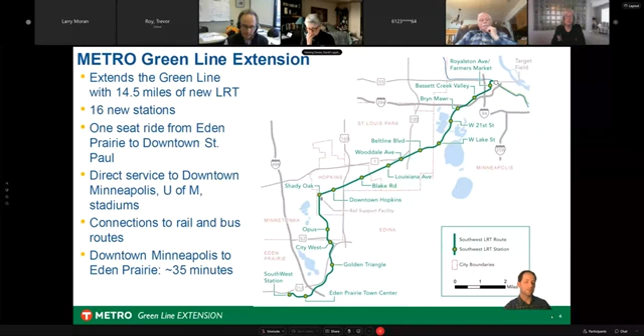As part of our construction project, this is the scope we always like to share. Not only are we building those new stations, but we have a number of new structures, bridges, and pedestrian tunnels. People are very familiar with the Kenilworth LRT tunnel, as well as the Trunk Highway 62 LRT tunnel being constructed on the west side of the project. We have a number of places where LRT crosses at grade - those are the LRT grade crossings - and we have over 125 retaining walls. So a lot of structural and civil work being done as part of this project.

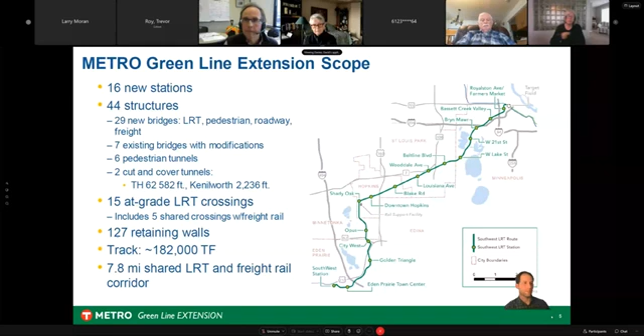So we'll get right into the project update. A lot of folks have seen this slide before. We just always want to set the table with what we have completed up to this date. We have the majority of utilities complete. Of course, a lot of the site prep, demolition, work zone establishment, that's mostly done at the beginning of the project. And we are right in the thick of the civil construction, which is the construction of structures, track, stations, some of the elements that I just touched on in the slides before.

As we move forward, we're going to continue with civil construction. We'll talk about that schedule in just a couple moments. But we have already started to initiate the other main portion of this work, which is the systems work, where we run the electrical and construct the overhead catenary system, our communication system, things like that. And then, of course, prior to opening, we will be conducting testing of the line before we have passengers on it.

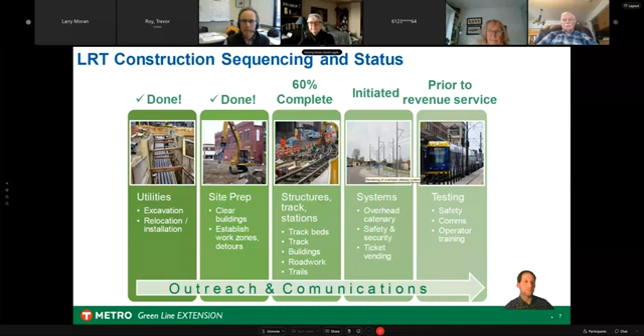So, as we're speaking to the Minneapolis community tonight, we know that the community is very familiar with a couple of the main challenges faced by the project, but we just wanted to run through them tonight. These are challenges that were either relatively unforeseen, or we knew about them but needed to work through them in a specific manner and order.

That includes the corridor protection wall up near Bryn Mawr and into downtown Minneapolis that was added by change order, even after the project started construction. That certainly has added some significant time to the construction schedule, specifically that schedule in Minneapolis.

We'll probably talk a little bit more about the secant pile retaining wall adjacent to the Cedar Isles condos. That was due to unforeseen soil conditions, right? The settlement that had occurred, and out of an abundance of caution, we pivoted away from the initial sheet piling method that was incorporated in the project to this different and more conservative method of retaining soil so that the tunnel could eventually be excavated.

That's another major complex change that had to be overcome and has caused delay. And then the incorporation of the Eden Prairie Town Center Station, of course, was also added to the construction contract by change order later on in the process.

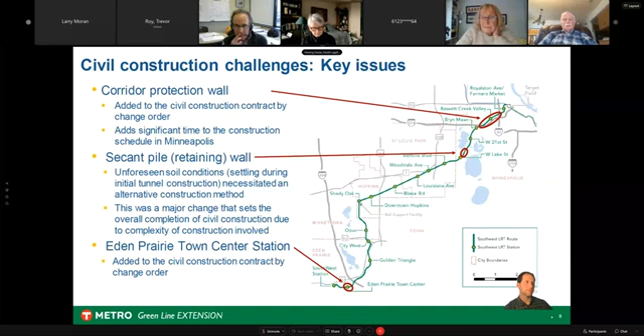We've laid this out in a couple meetings before, but we came out in January with information about a revised schedule and anticipated revised cost. We wanted to step through that with folks briefly tonight. We've been doing this in a number of different meetings. We want people to get a really good understanding of what goes into this revision of the Southwest Light Rail schedule. So what you're seeing here is we've got the original civil construction schedule and cost, but now due primarily to those changes that we just went through...

We've got a new scope, right? And new civil construction needs that need to be addressed. Those needs are being addressed through an agreement with Lunda McCrossan Joint Venture, our civil construction contractor, and the resulting change orders that will be processed, which will result, unfortunately, in an additional 34 months of anticipated civil construction. So the take-home message here is we've got our original schedule, and the changes to the project, which add on this time that's needed to construct those changes and deal with those changes, and that gives us the revised civil construction schedule and eventually the cost.

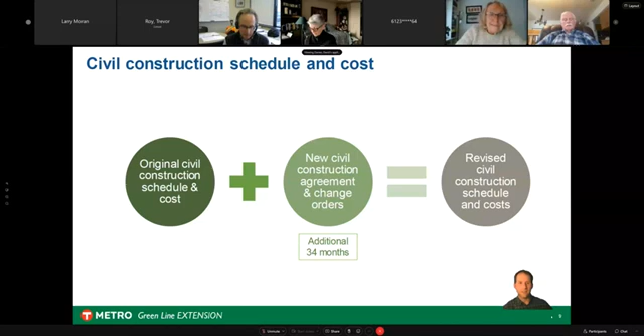A lot of people want to know what are the details behind this delay in this work, this added time and the cost. We're still figuring some of that out, right? There's still clarity to be had there, but we've been working at it for over a year now with the civil construction agreement, and we're working diligently.

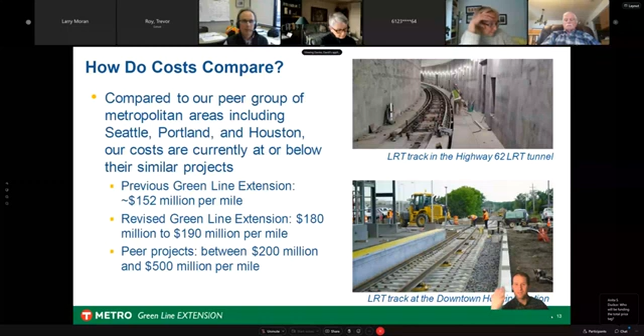Just giving a little comparison here: the original project budget was 152 million per mile. That's being revised upward, but we also see peer projects still in the 200 to 500 million range. Certainly there are other projects that cost less, you can find projects that are less, but we want to acknowledge that we still remain comparable to a lot of projects across the country, especially given the complexities of some of these, like a lot of bridges or tunnels, those very complex features that we are dealing with.

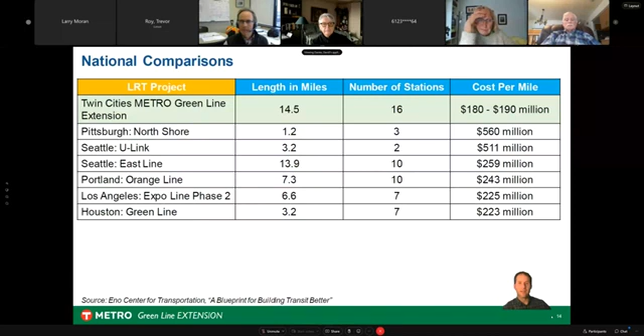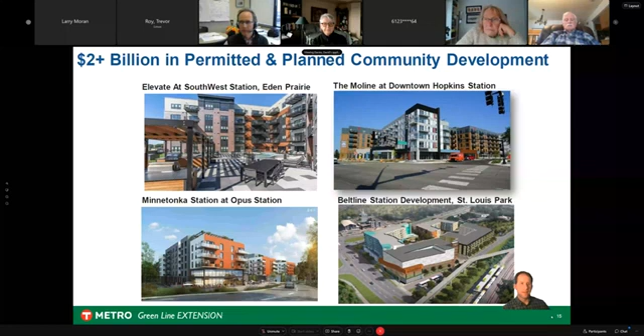We always like to remind people that even though the project is delayed, we've still seen a lot of investment already in this corridor, and we're going to continue to see investment, which is really positive. These are just a few examples, but it's exciting to see these entities already being active, and the corridor already starting to activate and be ready for our opening day.

Of course, we always like to report on and make people aware of the disadvantaged business enterprise goals that we have set. We want to make people aware tonight that we are currently achieving, or getting close to achieving, a lot of those goals when it comes to the disadvantaged business enterprises associated with the project.

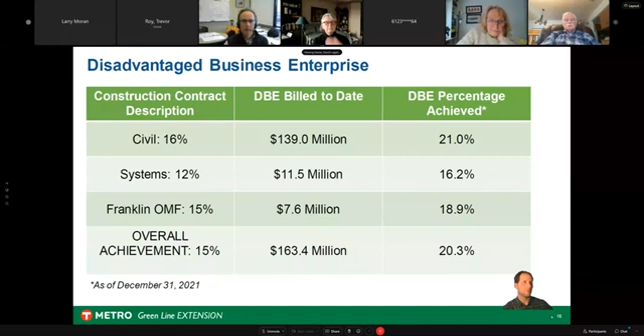Finally, this is our last couple of slides for the project update, and then we'll take a couple questions. It's important to remember that the people working on this, not necessarily council staff, but there are a lot of folks continuously employed as this work progresses. There's a lot of pride in that among the people involved here, and we always like to make sure people are aware of the folks continuing to bring home paychecks as we're progressing with construction.

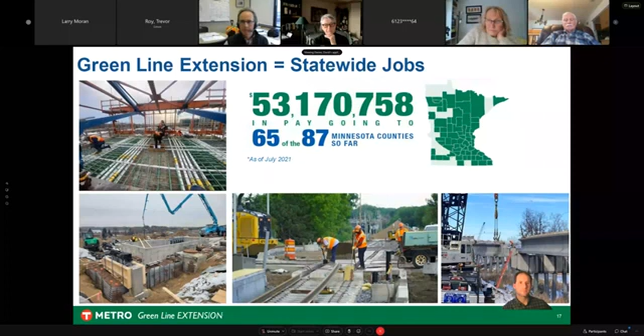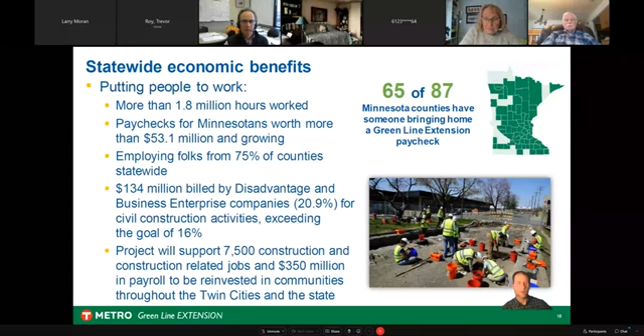This slide basically says that, but just gives you a little bit more meat on those bones in terms of just how much, you know, number of paychecks and how much money is being brought home by people who are affiliated with the project.

So I will pause there. I'm going to pivot to the chat and just see if there's anybody here that's given any chat questions.

And Anita asked who will be funding. We got a question about who will be funding the total price tag. That's certainly something that all the project partners are going to be figuring out in the coming months. That's sort of that acknowledgement that there is a funding gap, but everybody's working hard to figure out what to do there, especially as we move forward and have clarity with the exact price tag, as that becomes clear. And Anita, I think I see your hand up.

Yes, just for clarification, because you said on one of your charts that it wasn't going to be the city that was going to take on that price tag. So I would be interested in knowing, if it's not the city residents or taxpayers, then who would it be? Not that you have a total answer, but like who else is at the table that you're even considering?

Thank you. Say, David, this is Jim. Maybe I could speak to that. Sure, Jim. Thanks. All right.

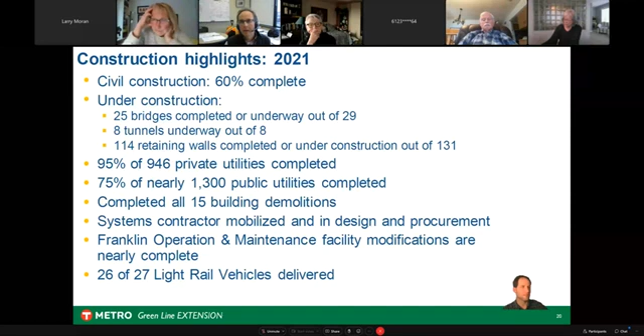This is our general slide - we have a vast majority of our stations underway. Certain stations are in much more advanced stages of completion. Up in the top right corner, you see the West 21st Street station, which looks almost as complete as some of the others along the line. It's pretty remarkable to see - you don't have to squint anymore to see what that really looks like, which is really cool.

There are a number of other stations in similar stages of completion along the line, and what you're going to see this year is work on some of those other stations coming up.

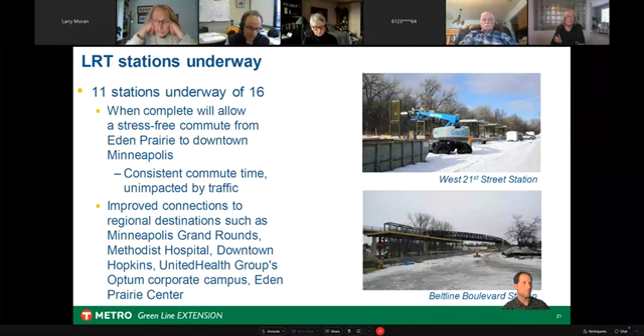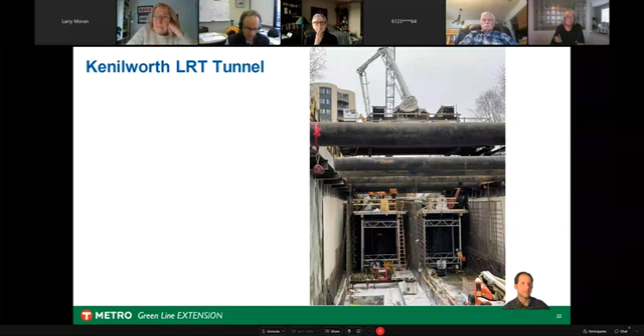In 2021, a lot of progress was made on the Kenilworth Tunnel, and it's pretty neat - we love this picture because this is one of those where you start to squint and really see the finished conditions - the two portals through which LRT is going to be traveling in the tunnel. That will be covered, so you wouldn't see it exactly like this in this spot, but it's neat to see that perspective of construction.

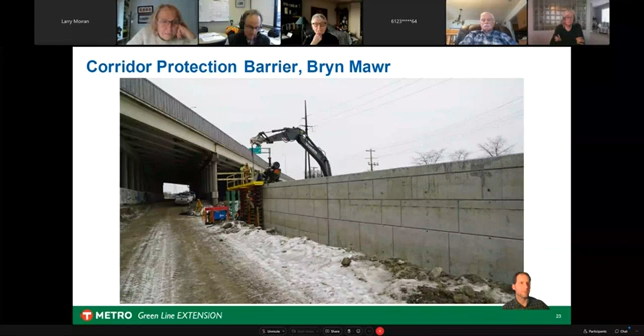One notable element we've talked about tonight is the corridor protection barrier in Bryn Mawr, and it's notable that the contractor has really been successful in moving this construction forward. If you're traveling along the Cedar Lake Trail in that area, you see significant progress in the drilled shafts and the rebar that was erected. They've been pouring concrete panels for much of the past 6 to 8 months, showing some real significant progress there. That's encouraging news over in the Bryn Mawr and Bassett Creek Valley area.

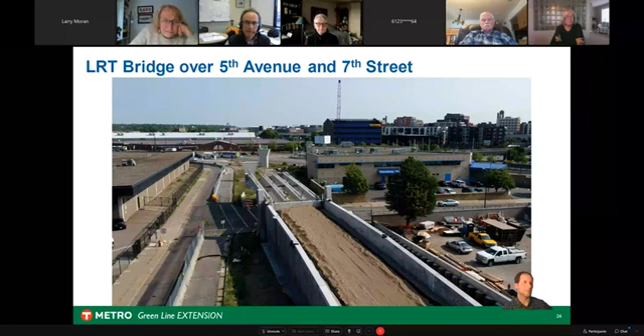So just briefly wanted to cover some of the notable activities and things you're going to be seeing this year in Minneapolis. Let me move my camera here so I can see my other monitor.

So, of course, we have secant wall construction, which is currently paused, but we see tunnel construction overall—construction of the tunnel that includes excavation, secant wall construction, and actual forming and pouring of the tunnel structure itself down in the excavation area. We see that all continuing to progress this year through 2022.

We had a meeting earlier this year about the closure of Cedar Lake Parkway, and at the time we certainly thought it was going to be closing earlier than it has. It has not closed yet, but we still anticipate about a 10-month closure. Right now, as of last Friday's construction update—please sign up for that—we think it's going to be more in the April timeframe to close down the parkway.

But once that's done, we'll be excavating and constructing the tunnel through that area. You'll also see, coming this summer and fall, more activity at the Kenilworth Channel area, including the anticipated demolition and construction of the trail bridge in that area.

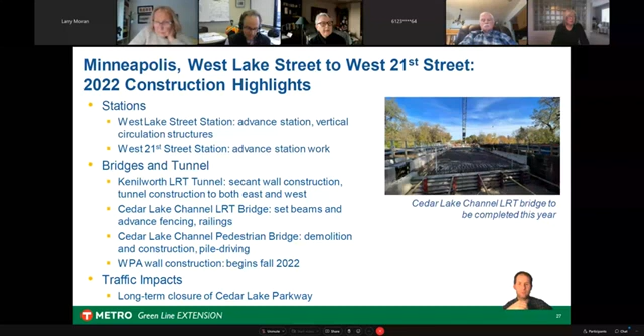So generally speaking, you're looking at advancing the station work at both West Lake Street Station and West 21st Street Station, continuing the Kenilworth Tunnel work, continuing the LRT bridge at the Cedar Lake Channel, and starting work on the pedestrian trail bridge and activating the site for WPA wall construction. Notably, as we talked about, is the long-term closure of Cedar Lake Parkway, which we will continue to provide updates on and make sure the community is aware of prior to the closing.

That gives you—I'll use this opportunity, if you haven't seen our video for how we construct the tunnel and how this will be phased through Cedar Lake Parkway. I just posted a link into the chat. This comes from our meeting in January about the closure. I encourage you to watch that; it gives a little more perspective on what's going on in terms of tunnel construction and the closure of the parkway, and why we need so much time.

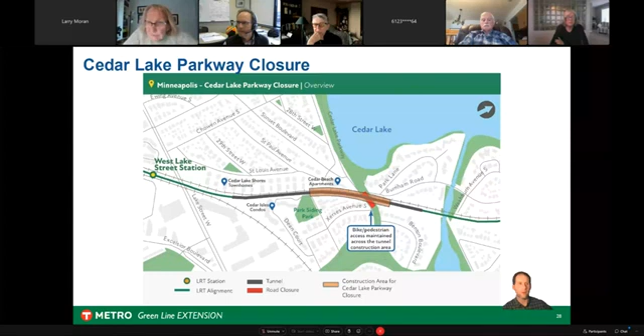All right, moving on. So we've got moving up into that Bryn Mawr, Bassett Creek Valley, and downtown Minneapolis area. Overall, what you're seeing is advancing the three stations in this area: at Bryn Mawr, at Bassett Creek Valley, and at Royalston Avenue Farmers Market.

Down at Bryn Mawr, you're going to see continuing work to construct the pedestrian bridge there that connects the intersection of Wayzata and Penn, coming out to connect to the actual station itself—that's out in the trail and rail corridor area. We do anticipate there could be some traffic impacts at Wayzata and Penn for some of that station construction. That's been a relatively quiet area, and our Bryn Mawr community members have been curious about when that's going to take place. We'll want to be in touch with them as there's more clarity regarding that schedule.

Corridor protection wall continues, certainly, as we've talked about. And then, notably moving up into the Royalston area, one thing we haven't done a lot of actually in Minneapolis, that we've done a lot of in the west part, is actual road work. A lot of our work is in the rail corridor. We've had roadway impacts or very targeted roadway work, and we will continue to have some of that.

But there's going to be some pretty significant road work along Border Avenue and Holden Street, right next to the Minneapolis Farmers Market. This is part of the project—it's a full roadway reconstruction, sidewalk to sidewalk, and we're coordinating with the businesses there to make sure we can keep access and move through that area as efficiently as possible.

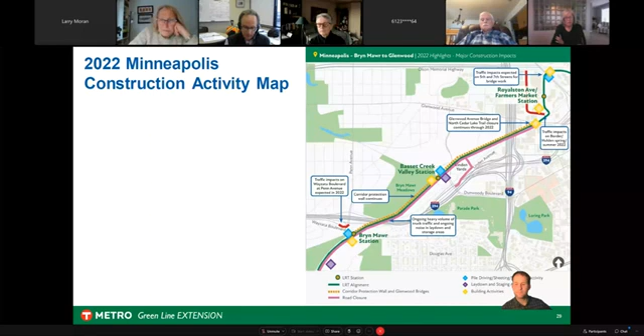So just to recap, stations are certainly going to be active sites this year. Corridor protection wall, you'll continue to see a lot of activity there.

Glenwood Bridge is certainly something where we've experienced some challenges. As we've talked about in the past, it's always challenging constructing this type of complex structure. Remember, it's three specific structures - they kind of tie into each other, two parts of a roadway bridge plus the LRT structure, and it's all next to the active freight rail.

We're looking to see how this work progresses, to see what a reopening schedule would look like, but a lot of that will depend on the progress that we can make through the main construction season. So there will certainly be updates on that front later this year.

And then you'll see, as I showed earlier, the image of the 5th and 7th Street LRT bridge that ties into Target Field. A lot of work on that area around the Herc incinerator as that structure gets closer to completion.

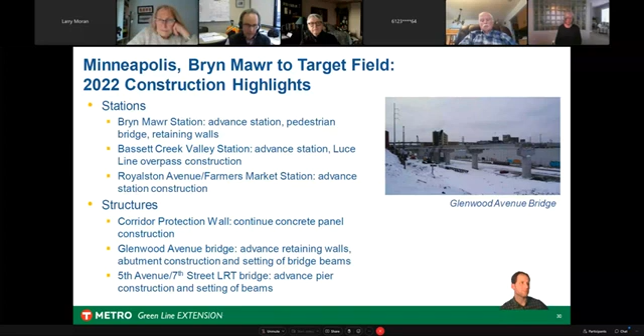Traffic impacts, we've kind of summarized this, but Border and Holden certainly going to be active for most of this construction season. 5th Avenue and 7th Street around that Target Field area is going to see some impacts probably as we're setting beams or constructing overhead. And then something for the Bryn Mawr folks, the Wayzata and Penn area for that roadway reconstruction near the station.

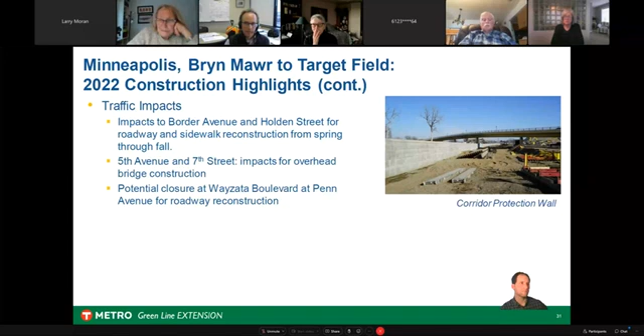Just a couple notes on the group that I am a part of on the project office, the communications and outreach team. We were certainly, even though construction events were fewer, we still had a very busy construction season last year, and took a lot of calls, answered a lot of emails, still had a lot of meetings, both on-site and virtual, connecting with the community.

Here's my information. I think a lot of folks at this point on this call would probably have my information, but I certainly encourage you to reach out if you continue to have questions, are curious about any part of the construction. As COVID seems to be a little bit less severe, this coming summer, we'd really like to get back out there and do more tours, getting people up close and personal to some of these construction elements, let people see firsthand what's going on out there. They're really great opportunities.

We'll be advertising those opportunities as they come up. But one thing I just wanted to note is in terms of what we want to do this year.

In Minneapolis, I feel lucky that I get to connect on a few different levels. We've got these big plenary meetings where we get to talk to an entire community all at once. I get to go monthly or every other month to some of the neighborhoods, to the Cedar Isles Dean neighborhood and to the Kenwood neighborhood, sometimes to the West Maka Ska neighborhood to present there. And I also communicate with people on an even more granular level.